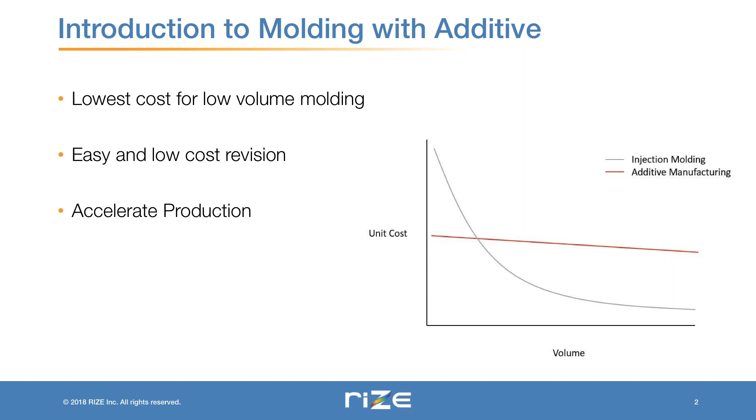Now, there is a wide variety of additive manufacturing technologies that can be used effectively to create molds. However, RIZE printers and materials have a few unique features that make them particularly useful.

RIZE printers use a patented technology called augmented polymer deposition, wherein we jet functional inks between layers of extruded thermoplastic. The way this works is that first, support is extruded with our thermoplastic material. Next, release ink is placed on top of the support structure. Then the model material is extruded on top of the release ink in our thermoplastic material.

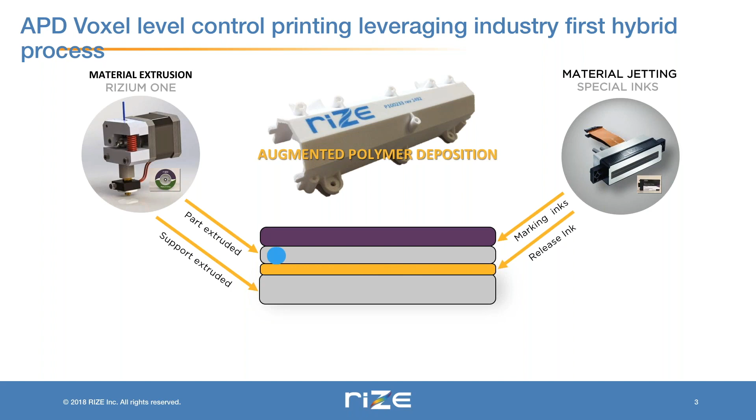And then functional inks, including marking ink, can be applied to the surface, as shown here, by jetting that blue marking ink in between the layers of the extruded thermoplastic.

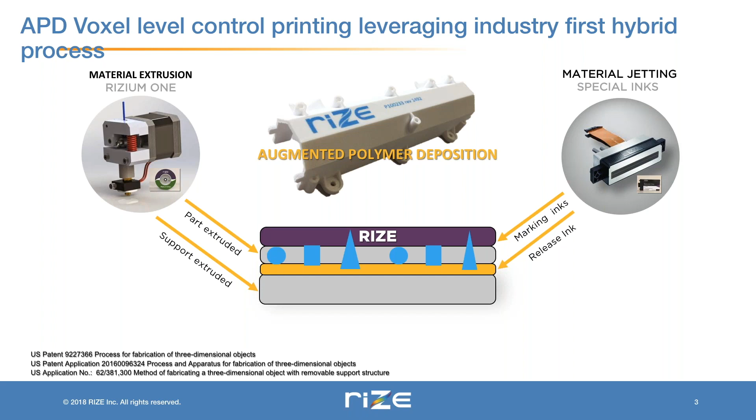So Rizium is our proprietary thermoplastic, and it's optimized to interface effectively with our different functional inks. It has several features that are very helpful for use in molds.

Our functional release ink, which is jetted between the interface of model and support structures, allows supports to be easily and rapidly removed, which helps get the finished part in your hand within minutes or even seconds of completing a print job. In some cases, this can enable multiple prototype iterations in a single day, allowing you to rapidly redesign and produce molds.

Rizium also has a very low surface energy. Consequently, most materials do not adhere well to it, allowing molded parts to easily release from its surface with no release agents or surface priming required. This makes Rizium molds quick and easy to use with minimal extra processing required.

Rizium also has a strong chemical resistance, making it resilient to acids, alcohols, acetone, and much more, most particularly the molding solutions that we use for injection.

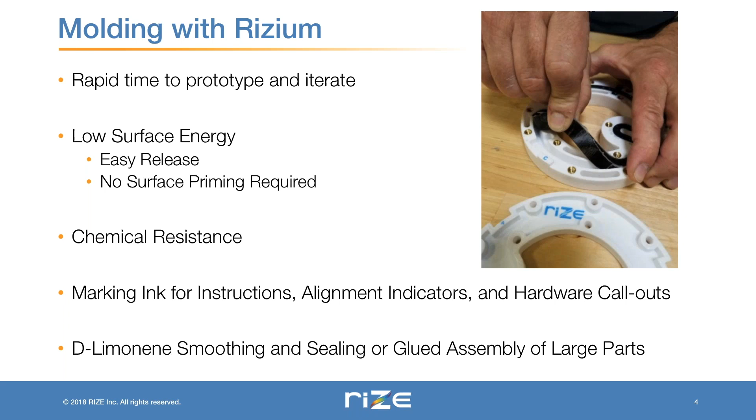Some other useful features include the ability to apply instructions, indicators, callouts, and other annotations using our functional marking ink capability. And finally, the chemical D-limonene, which is derived from citrus fruits and is very safe, can be used to glue large components together. It can be used to smooth mold surfaces or seal parts for higher pressure injections.

So there are just a few materials that we use with 3D printed molds. Urethane and silicone are the two primary materials that we inject. Both of these are elastomeric or flexible materials, which are useful for many applications, but will of course not be appropriate for applications that demand rigidity.

In cases that do require rigidity, you can try injecting epoxies, which have had only limited testing here.

Machined injection molding tooling is fairly expensive, but generally has very smooth surfaces that easily release molded parts. 3D printed molds, on the other hand, will typically have some surface imperfections that in some cases can bond with molded parts and create more friction during release.

So while elastomeric materials are flexible enough to accommodate the surface imperfections typical of 3D printing and still release easily, rigid epoxies are more difficult, and it's important to smooth surfaces as much as possible and to stick to simpler geometries if you do attempt to use rigid epoxies.

Now, Rizium can be smoothed using D-limonene, as mentioned previously, as well as tumbling or sandpaper. It can also be effective on more challenging molds, such as those using rigid epoxies, to separate the mold design into additional interlocking pieces, wherein each piece only touches the part on a smaller section of its surface. This will make it easier to remove individual pieces by reducing the total surface area that must be freed with each separation.

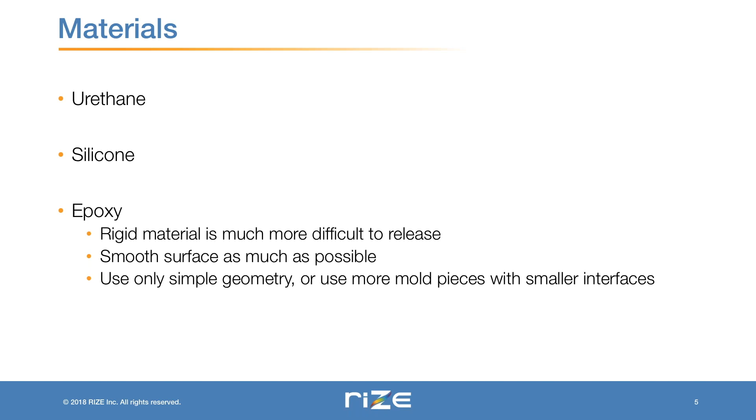Here are some of the ways that 3D printed injection molds can be leveraged. As mentioned previously, injection molding can be a powerful tool for increasing your rate of production, though this strategy will not work for all applications because, as discussed on the prior slide, the materials available for 3D printed injection molding are limited and preferably elastomeric.

However, there are still many applications for which simple or elastomeric parts are useful, and the low cost of 3D printing at low volume can allow you to print several molds and linearly increase the rate of production of molded parts to a much higher volume.

3D printing and testing molds can also be a useful verification step before investing a lot of money and many weeks of lead times into having injection molds machined. Finally, some of the common uses of elastomeric molded parts include gaskets, flexible components, and soft handles, covers, or other surfaces.

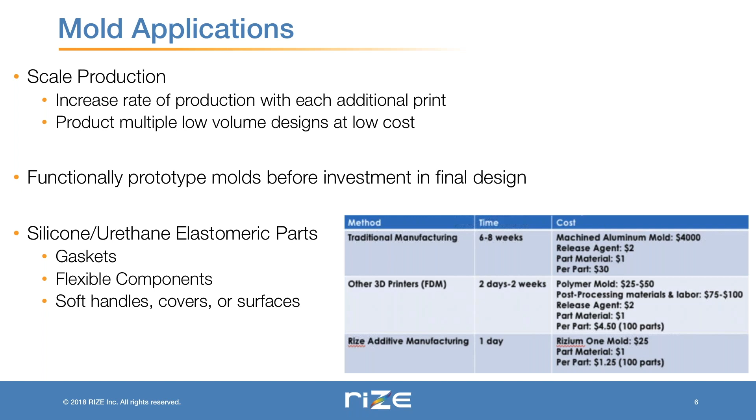Now, there are several important things to consider when creating designs for your molds. First among these is the method by which you convert the design for the part you desire into the design for the mold that can produce it.

Assuming that you already have a model file for the target part, you can process that model in a few ways. One would be to extrude material around the part in your CAD software and then subtract the original part from the volume of the extrusion. This will create a perfect cavity that can then be split into your separate mold components and printed.

In cases that require precise tolerances, you may find that you need to create a slightly offset surface from your part to leave extra room for the molded part to fill out its dimensions.

And the final method is to use a mold making tool that is built into your CAD software. SolidWorks has this capability as well as many other CAD programs, and using it can help you make the right design choices to create an effective mold.

Another important consideration is that of alignment and fastening. It's important to ensure that after the components of your mold have been printed, that they can be precisely assembled and secured such that no injected material will leak and none of the geometry will be misaligned.

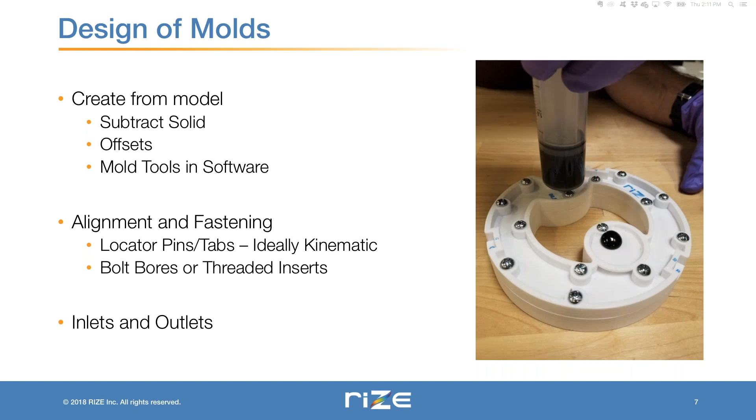So here I will discuss a few best practices when designing molds. Regarding those inlet and outlet holes, it's best to place them as far apart as possible to ensure that the injected material pushes the air out of the cavity entirely.

Also, for molds with 2 or more paths from the inlet to the outlet, such as the mold shown, where half of the injected material will go clockwise and half of it will go counterclockwise, in these cases, you'll want to place both the inlet and outlet on a face of symmetry if possible, so that one side of the flowing material doesn't outrun and block off the air escape of the other.

Now, to maximize the surface quality of the parts you produce, it will help to smooth the active surfaces as much as possible using D-limonene, sanding, or tumbling. Any surface defects that appear on the surface of a 3D printed mold will be reflected in the surface of the molded parts it produces.

So any stepping or seams must be smoothed out if you don't want them to appear on your parts. And in some cases, those things won't be a big deal, and you maybe don't need to put in the extra effort to remove them.

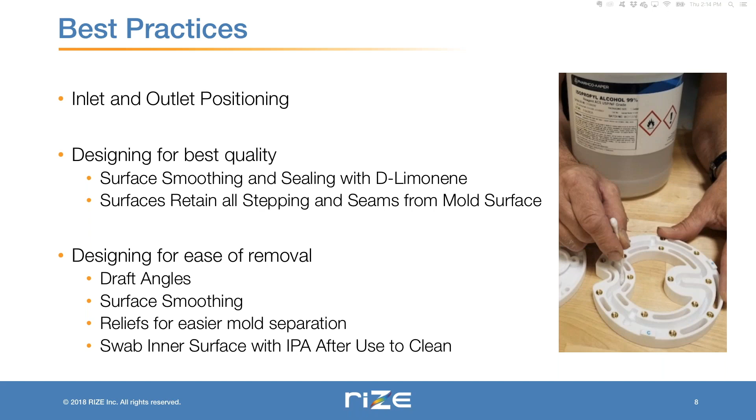I'm now going to cover a few advanced strategies for taking full advantage of molding with additive manufacturing.

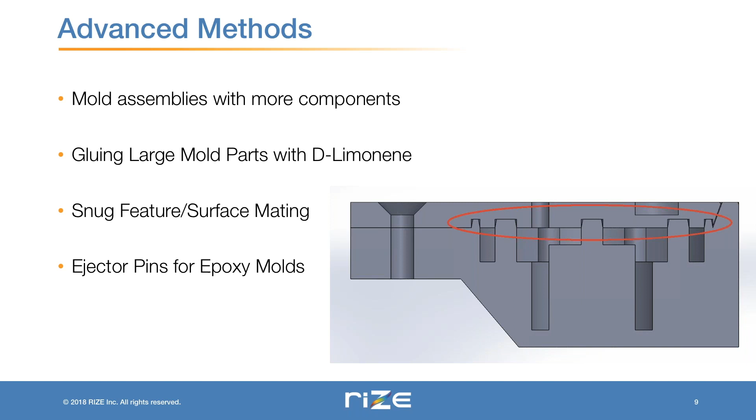The last advanced method is the use of ejector pins for epoxy molds. Because epoxy molds are more difficult to extract, it can be useful to use a strategy from traditional injection molding and include some openings for pushing the parts out from the back.

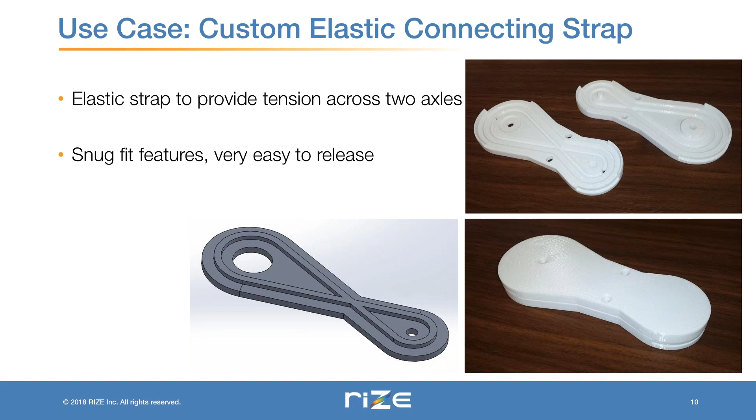And here is another use case. This is a soft coupling that can be used in a low torque application wherein the axles may not be perfectly aligned. Its flexibility can manage the motion and alignment of the axles, and it can also manage any vibrations that may be transferred across the joint.

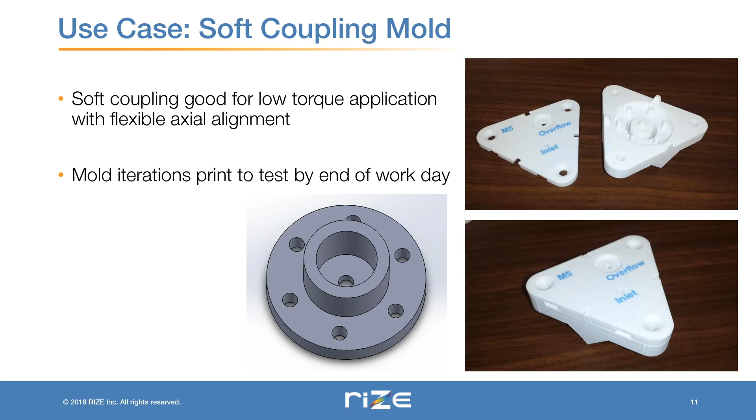The mold for this part is small enough that it can be printed within one day, and it was tested over the first night after printing. On this mold, marking ink was also used to identify the inlet and outlet holes, as well as hardware callouts for fastening.

All right, finally I will quickly review what I've covered today. 3D printed molds can be used to effectively accelerate production of simple parts. It also allows you to prototype mold designs for traditional manufacturing at low cost. The easiest materials to use are elastomerics, including silicone and urethane, which are useful for applications including gaskets and soft couplings. Finally, 3D printing molds with Rize allows you to more rapidly prototype and iterate your designs, either for the molds themselves or the parts they produce.